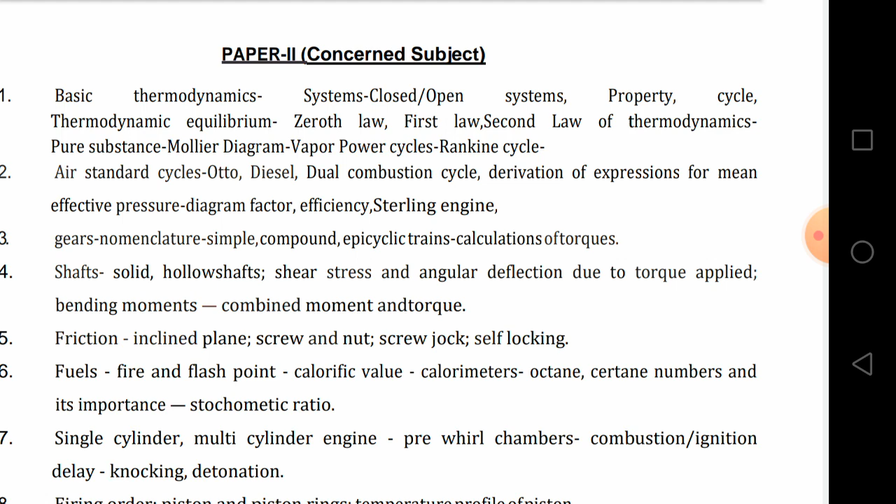Before elections, we all know recruitments will be made, and it is necessary for the government to fill up existing vacancies. There are about 2.5 lakh vacancies in Telangana, and maybe around that figure in Andhra Pradesh too. So they have to fill up these vacancies.

If the notification comes - and already the Andhra Pradesh government has released a calendar in which they have mentioned this post will be recruited under Group 2 or separately - this is under the transport department, you know that. They have mentioned in the released calendar that the examination notification will be coming in the month of March.

Assuming the notification comes in March, with 1.5 months given for your preparation, the examination is likely to be conducted in the month of May. Add 2 months - so January, February, March, April, May.

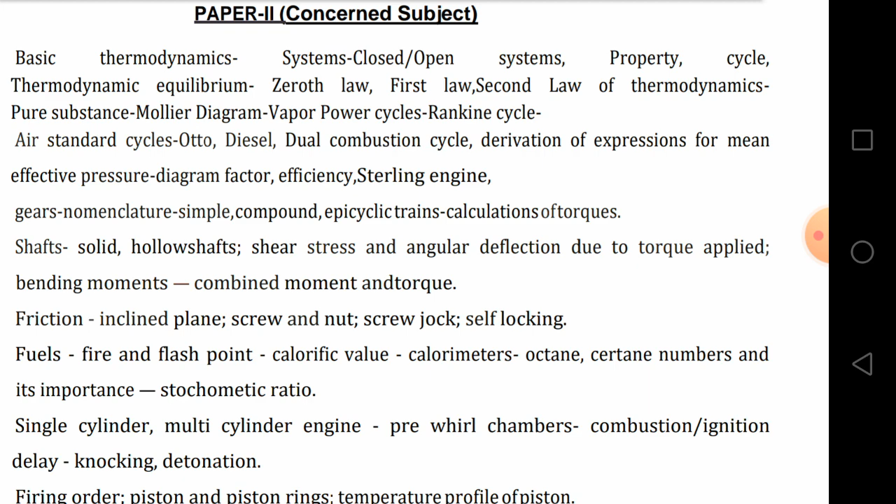So let us go to the syllabus part of this automobile engineering. I have completed 2 batches, realizing the importance of this post and the nature of the job. You are going to use your mechanical diploma or BTech mechanical engineering knowledge, you are definitely going to use it.

It goes without saying that we will definitely excel in the field related to our own field. For example, if you are a mechanical engineer, diploma holder in automobile or mechanical, or a BTech holder in mechanical engineering, you will thoroughly enjoy this job. This is a uniform job, and the job prospects are very great, as you all know - I need not elaborate on this.

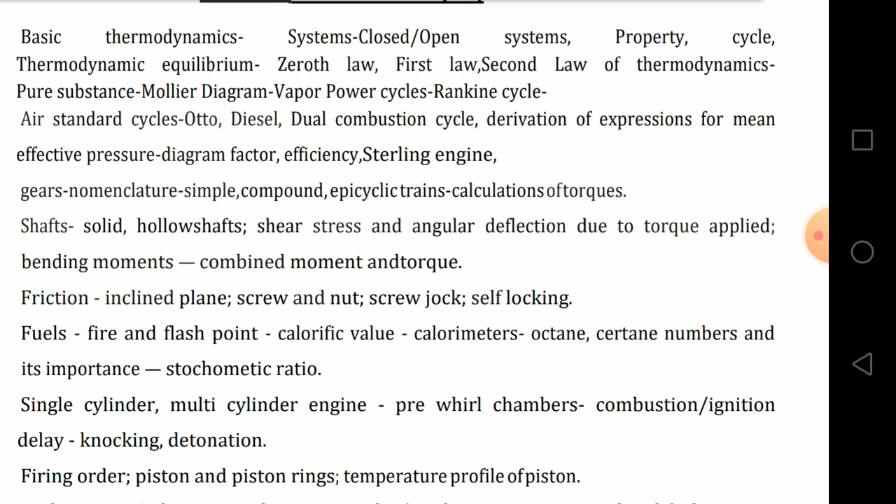So now let us go to the syllabus part of automobile engineering. I have completed 2 batches. Some friends who realized the importance of this job, and the time element and amount of preparation required for 2 papers - Paper 1 and Paper 2 - have already joined and completed their entire syllabus.

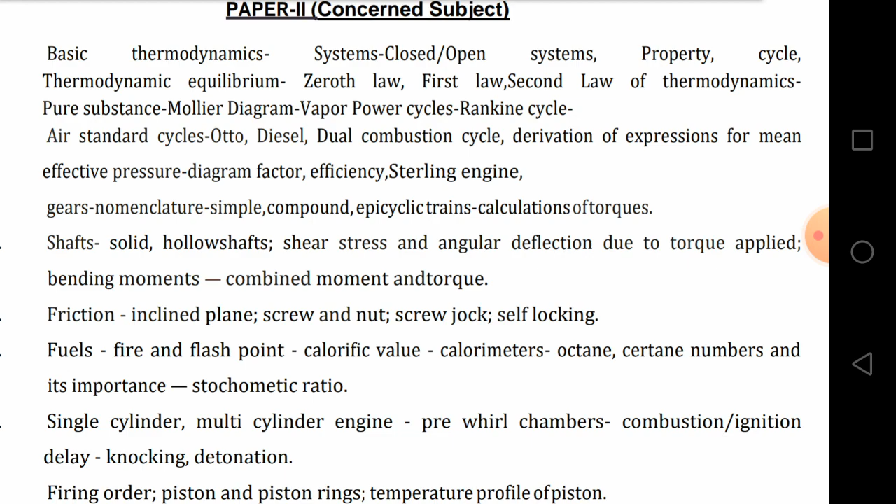I have completed this entire syllabus single-handedly, meaning there is no change of faculty. Normally in other institutions there may be different faculty for different subjects, but here there is no question of such a change of faculty - I am dealing with the entire subject myself.

I am basically MTech in mechanical engineering production, BTech mechanical and MTech production. I worked for a number of years in teaching, probably more than 20 years of experience. I have taught automobile subjects for more than 10 years.

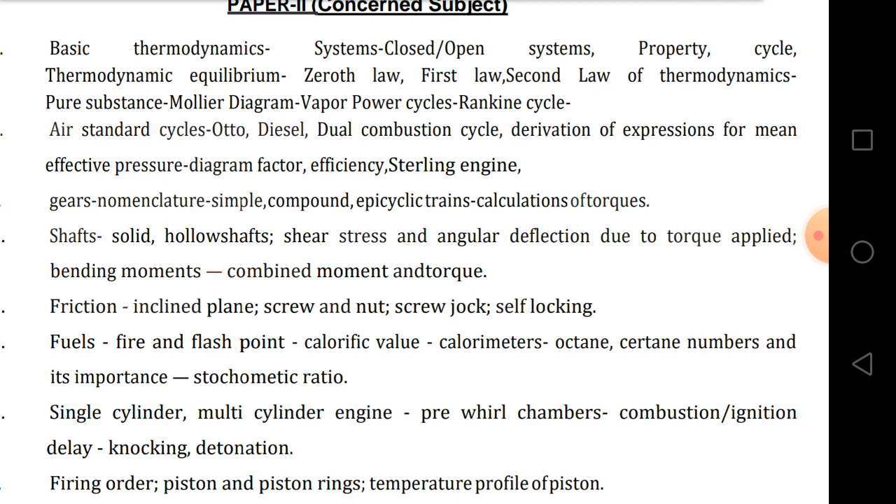Let us throw light on this particular syllabus. It goes like this: basic thermodynamics - you have systems, closed and open system, property, cycle, and thermodynamic equilibrium, Zeroth law, first law and second law of thermodynamics, pure substances, Mollier diagram, vapor power cycles, and Rankine cycle. We are going to discuss all these things.

I am taking the batch, teaching morning 1 hour and evening 1 hour to complete the syllabus. So if we take up classes every day for 2 hours, we will finish the syllabus in 2.5 to 3 months.

If we go 1 hour per day, we can complete it in 3.5 months. So this is your basic thermodynamics. If you go by the syllabus, our mechanical syllabus will be of such nature that it mentions only one topic, for example thermodynamics laws only.

In the Telangana syllabus it was mentioned as thermodynamic laws, but it includes all these laws. So what is thermodynamics and the different types of systems, and basically 3 laws are there - actually 4 laws. Zeroth law of thermodynamics, first law, second law, and also third law, which tells us about absolute entropy. It will just be mentioned simply like that.

For example, in cycles you have to study a lot of things, and in systems you have to study open system, closed system, and the flow energy equation, like that. So there are so many things, and you have to practice a number of problems in every topic.

And if you go to air standard cycles - Otto, diesel, dual combustion cycle, derivation of expression for mean effective pressure, diagram factor, efficiency, and Stirling engine - to study the cycles itself, I have taken 3 to 4 classes.

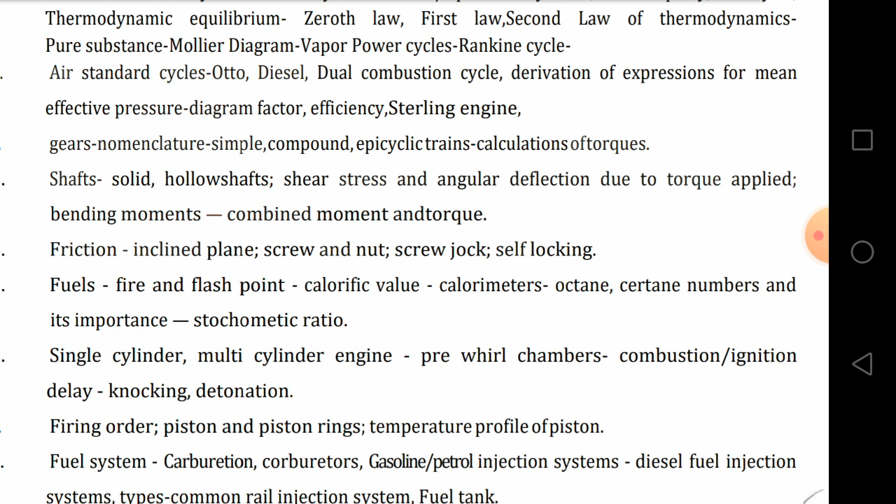Also comparison between various cycles - here he has not mentioned about the comparison, but we have to compare cycles like Otto cycle, diesel cycle, dual cycle, etc. And then diagram factor, efficiency, and Stirling engine. So what is the relationship? All these cycles are related to your Stirling engine.

So definitely we have studied all these things. Now coming to gears and nomenclature - this is coming to your theory of machines part. So after thermodynamics, now it is kinematics of machinery, KOM.

Gears and nomenclature, simple compound epicyclic gear trains, and also calculation of torques. This has actually consumed 3 classes.

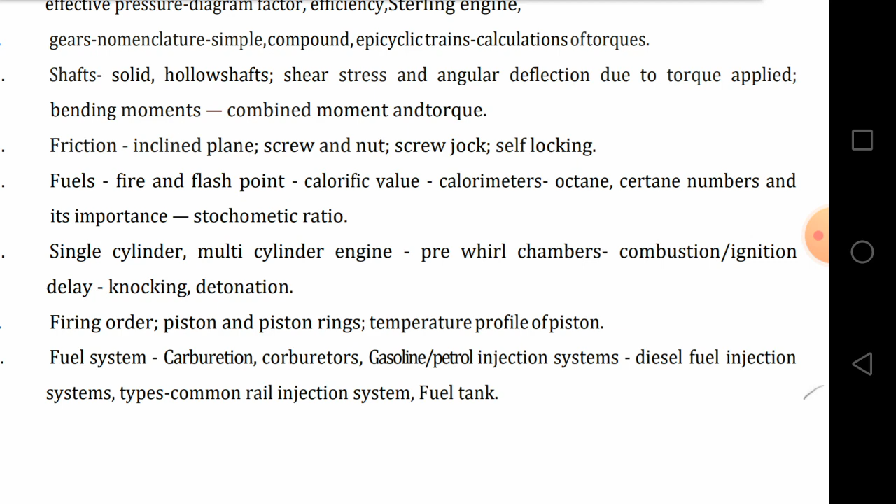Now coming to shafts - solid hollow shaft, shear stress, angular deflection due to torque applied, bending moments, combined moment and torque. A shaft is basically a mechanical element used to transmit power. You have to know the difference between axle and shaft, and one more thing.

It is subjected to various types of loads. Basically it is subjected to 2 types - shear stress due to rotation, and bending stress and shear stress. It may sometimes also be subjected to axial load, causing axial stress. For example, marine shafts are subjected to 3 types of loads: axial load, bending load, and torque due to rotation.

So all these things we have to study. For hollow shaft, we make a comparison with solid shaft - how it is different, and what is the saving in weight if using a hollow shaft instead of a solid circular shaft. We also combine bending moment and torque, because the nature of bending stress and shear stress are different - you cannot combine them directly, you have to combine through principal stresses. This also we have done.

Then comes friction on the inclined plane, screw and nut, and then screw jack and self locking. What is the condition for self locking? What is the efficiency of a screw jack, and what is the effort required to raise the load and lower the load, and so many other things are involved.

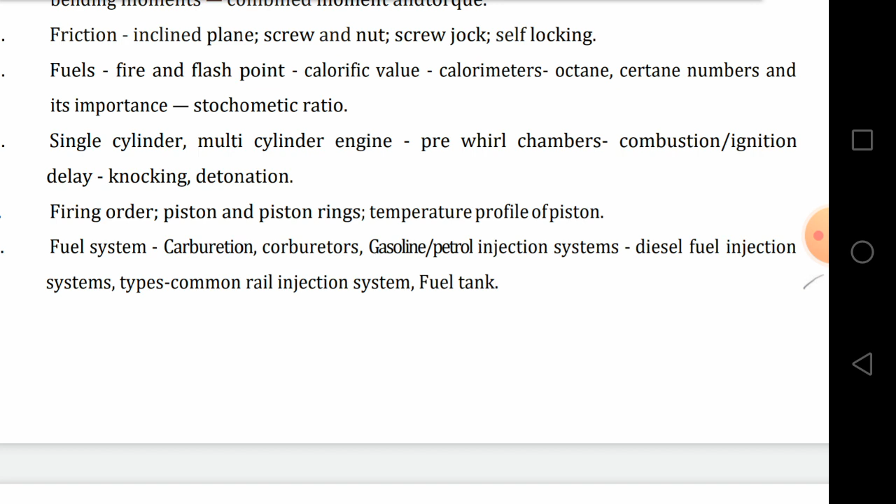And also what is octane number, cetane number? We know that it is how your SI engine fuel or petrol is rated. Similarly, cetane number, your diesel fuel is rated through the cetane number, and then its importance. And also stoichiometric ratio, what is stoichiometric ratio? It is 14.5:1, the amount of air and fuel ratio which results in complete combustion of the fuel.

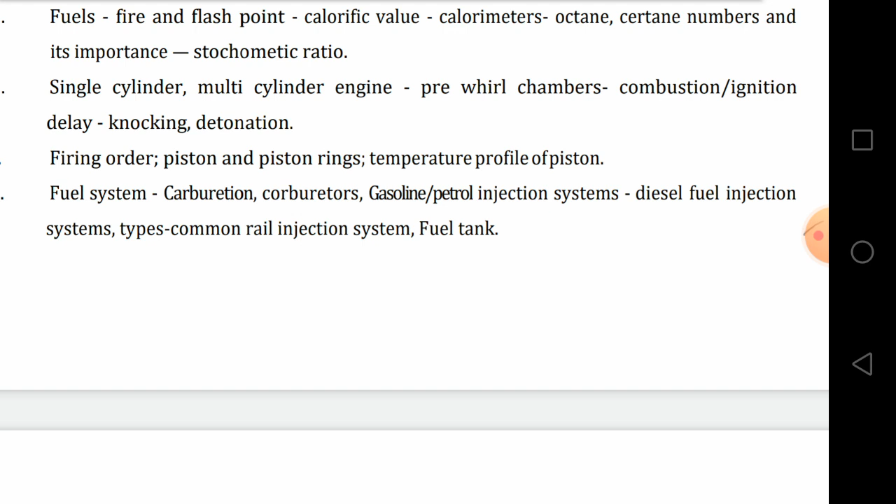Your vehicle will be operating in different conditions, starting, idling, and acceleration. The requirements of air fuel ratio depend upon the engine operating conditions, first gear, second gear, third gear, fourth gear, and neutral, etc. These things also we have done.

Single cylinder, multi-cylinder, what is the difference between single cylinder engine and multi-cylinder engine? Pre-chambers, number of chambers are there: open chamber, closed chamber, direct combustion chamber, and indirect combustion chambers. Various chambers are there, we have discussed and we are going to discuss all these things.

And also combustion ignition delay. This knocking detonation phenomena is different in your SI engine and CI engine. So what are the governing factors? What factors will increase or decrease the detonation tendency, or your knocking tendency? There are around 12 to 15 factors. We have discussed how knocking is going to affect mean effective pressure, engine performance, or engine power output, etc. All these things we are going to discuss.

Then firing order, what is the firing order? It is the order in which the cylinders are fired, like in a multi-cylinder engine. For example, for a 4-cylinder engine, it is 1, 3, 4, 2. First cylinder will be fired, then third cylinder, then fourth, and then second cylinder, like this.

Then your piston and piston rings. What is the material of the piston? What is the piston ring? What is its importance, significance? What is its use? And temperature profile. You have 2 types of pistons, and we have seen the temperature profile. What is the temperature profile? It gives the temperature in various locations of the piston.

There are various locations, what you call piston skirt is there, cylinder head is there, and so many other things related with the piston are there. So what is the temperature? Piston center, what is the temperature, for example, like that. It tells us about the distribution of temperature in 2 types of pistons. Heat shielded piston is another piston, and we have discussed all those things.

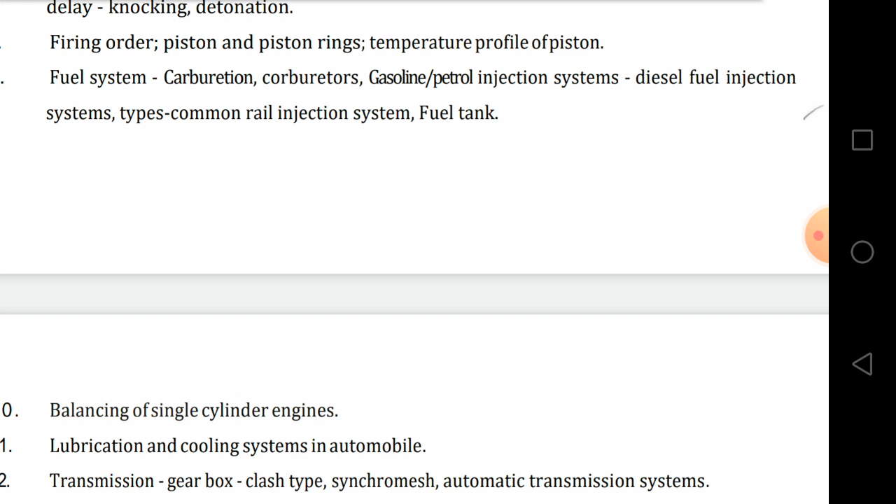And then comes your fuel system, carburation. What is carburation? It is the mixing of air and petrol in the proper ratio before it goes to the cylinder, done in your carburetor. So types of carburetors also we have discussed, like open draft, based upon the draft there are types of carburetors. We have discussed them, and gasoline/petrol injection system.

So in the injection system we have petrol injection. Nowadays engines are using petrol injectors, what you call injection system. But earlier vehicles did not use injection system, only carburetor used to be there, and spark plug is going to be used there.

But in diesel, you have what you call diesel injector, fuel injector. So there is a lot of difference. Nowadays, we are going for injection systems in petrol engines also. We have discussed various types of injection systems, like airless injection, air injection, and also diesel fuel injection system types, common rail injection system. This is a very important system for your diesel injection.

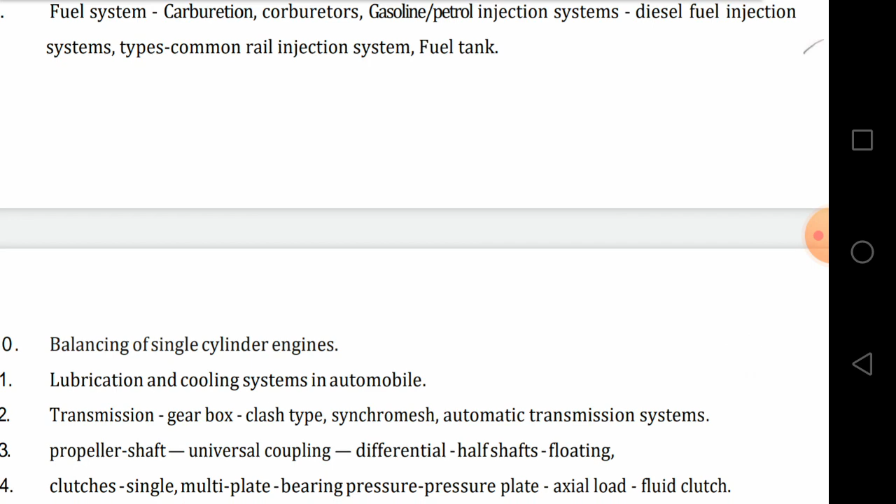And then fuel tank, what is fuel tank? How it is made? What are the materials of the fuel tank with which it is made, and which are going to have advantages? All these things we are going to discuss, and we have discussed.

Then comes your balancing of single cylinder engines. Basically, there are 2 types of mechanical parts: one is the rotating parts, other one is the reciprocating parts. You have 2 things in this: balancing of rotating parts and balancing of reciprocating parts. It's a big chapter, I have taken 5 classes for this, 2 for the balancing of rotating parts and 3 for balancing of reciprocating parts.

Then comes your lubrication.

And cooling systems. Number of lubrication systems are there, number of cooling systems are also there. We have discussed in detail lubrication systems - I have taken 3 to 4 classes. Number of things are there: what is lubrication, what is lubrication rating, how the API, American Petroleum Institute, has rated it, what is the formula for that, and all those things.

And then cooling system. In the cooling system, we have basically two types: one is the air cooling system and water cooling system, and what are the relative advantages and disadvantages, and how it is going to work with air cooling system and water cooling system. This also we have done.

Transmission, basically transmission is two types. One is the manual transmission, second one is the automatic transmission. We have discussed gearbox, normally known as manual transmission. In short, gearbox indicates manual transmission, and there are various types of gearbox, like synchromesh gearbox, sliding mesh gearbox, constant mesh gearbox - all these things are there.

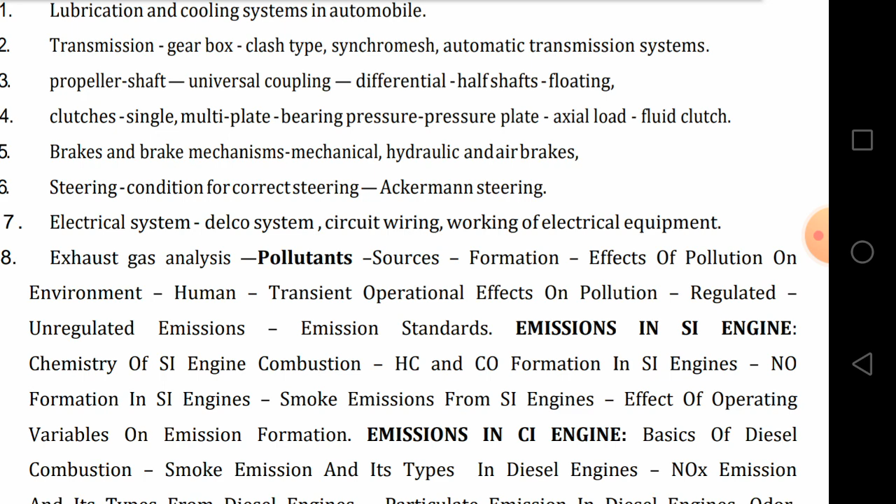It has not clearly mentioned, but we have discussed all those things: what are the advantages, what are the relative disadvantages, and how you are going to change the gear, how to get neutral gear, second gear, top gear, reverse gear, etc. All these things, and clutches, propeller shaft - this all comes under transmission, from transmission of power from engine to differential. And what are the connected things? The universal coupling, differential - all this comes under your transmission system.

Then your clutches. What are the different types of clutches? What is the importance of clutch? What is the main use of a clutch? And then bearing pressure plays a very important role in place of clutch. And then fluid clutch also we have discussed, in which the power is transmitted because of the action of the fluid between the driven shaft and driver shaft.

Now comes your brakes and brake mechanism. Types of brakes - number of types are there: mechanical, hydraulic, and air brakes. So what is the advantage of air brakes? You know that air brakes are used when you have to stop the vehicle at short distance.

And then your steering condition. There are basically two types of steering gears: Ackermann steering gear and Davis steering gear. We are going to study about the Ackermann steering gear, condition for correct steering, and also we are going to do some basic problems.

And cot phi minus cot theta is equal to B by L - that is the condition for correct steering, and we have discussed this. And there are a number of differences between these two, Ackermann steering gear and Davis steering gear. We have discussed all those things.

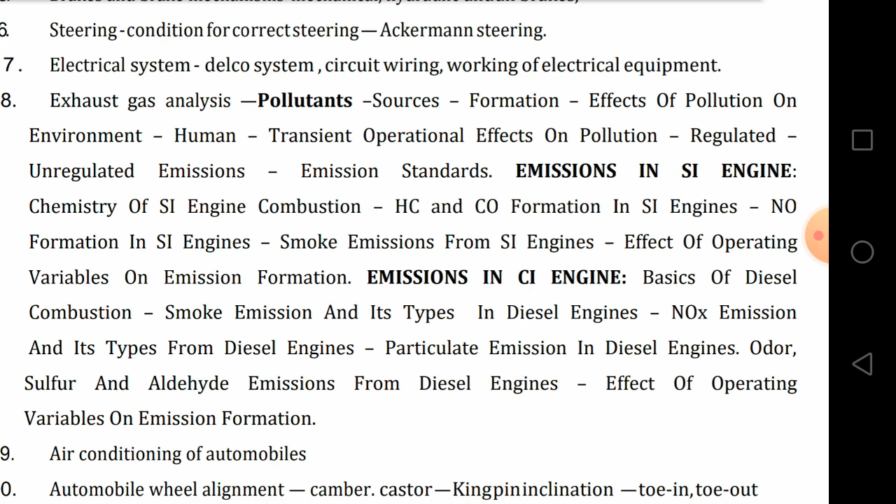Electrical system: Delco system, circuit wiring, working of electrical equipment. Various electrical equipment are there, and how they are going to work - we have discussed all those things, and especially this is a very, very important topic, friends.

Your exhaust analysis, in the last 2018 paper, I have seen about 12 to 15 bits were asked, more than 12 bits from this particular exhaust gas analysis only. So all these things: sources, formation, effects of pollution on environment, transient operation - especially emission standards are very, very important. You can get some good questions from your emission standards.

Currently we are using in India, and internationally, various emission standards - they are called Bharat stage emission standards. We have discussed all these things.

Then comes emission in SI engine. So emission phenomena in SI engines are going to vary from emissions in CI engines - like what is the chemistry of SI engine combustion. This all comes under combustion, and then after combustion you are going to have the exhaust. In the exhaust we are going to have three elements: hydrocarbon emission, unburnt hydrocarbons, carbon monoxide, and NOx emission. So there are going to be a lot of differences between NOx emission in SI engine and CI engine.

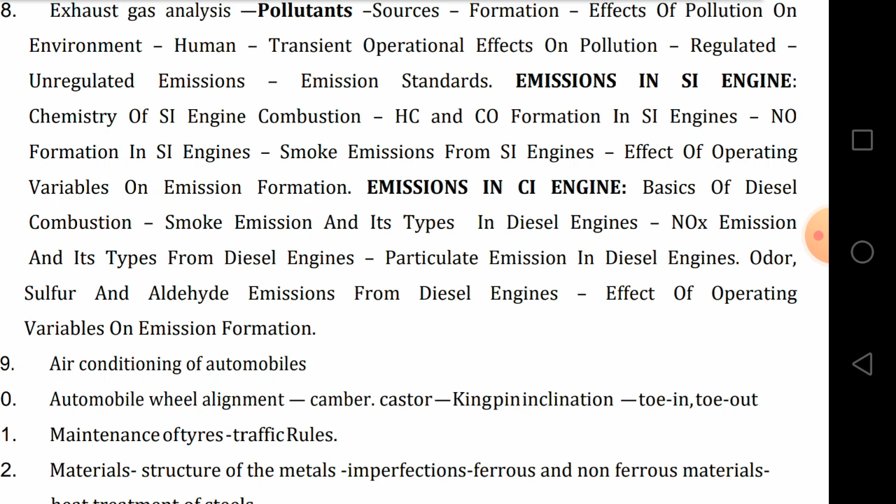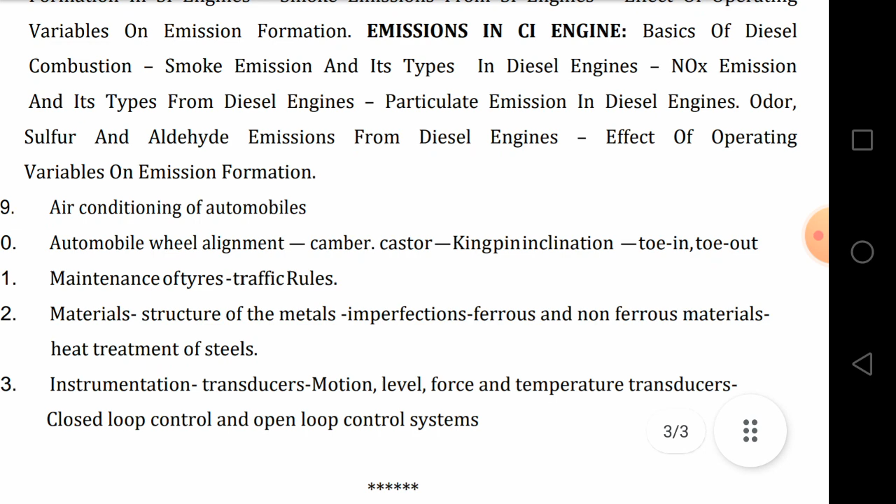We have discussed all these things, especially smoke in case of diesel engines in some operating conditions, effect of operating variables, and emissions in CI engines. Also CO emissions, HC emissions, and NOx emissions in both engines. Particulate emissions you can see only in diesel engines, not in SI engines. Then odor, and other emissions like sulfur and aldehyde.

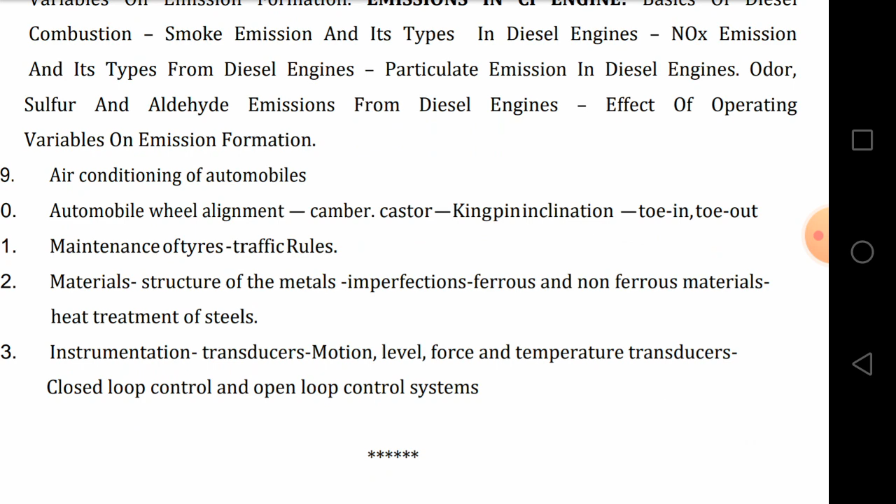And what are the effects of operating variables on these engine emissions, like CO, HC, and NOx emissions.

Then we have studied about air conditioning systems. What type of air conditioning systems are used? We have two systems: one is the simple vapor compression refrigeration system, and the other is the vapor absorption system. We studied their advantages, disadvantages, relative advantages and disadvantages, and if any other refrigeration systems are there, what is the difference between those.

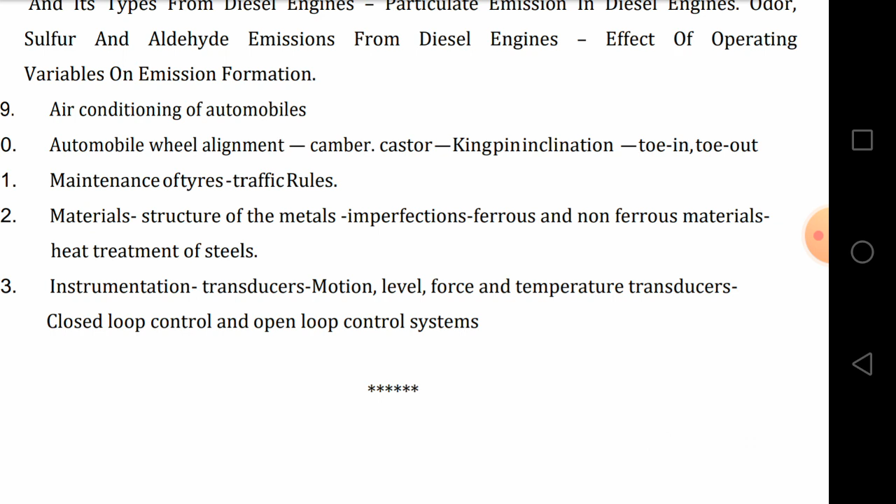Then comes wheel alignment, which is very, very important, from automobiles. For this we have studied from Kirpal Singh's Automobile Engineering, volume 1 and volume 2. For IC engines, we are going to follow IC Engines by V. Ganesan.

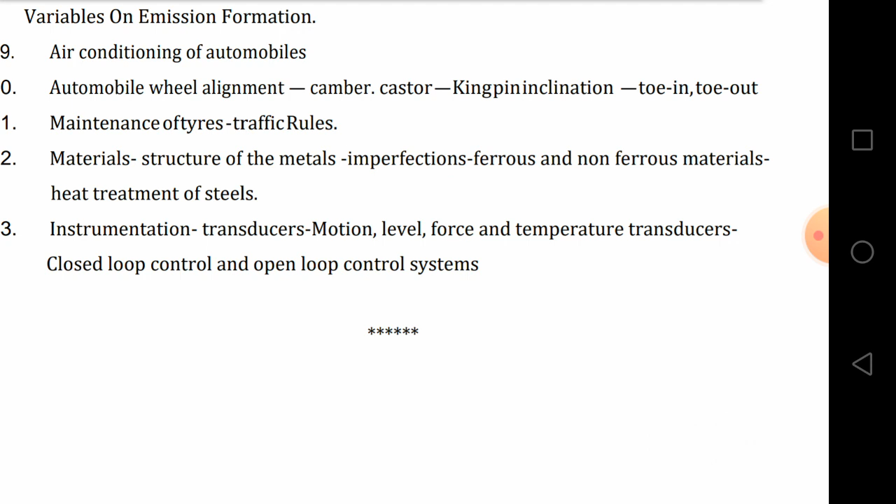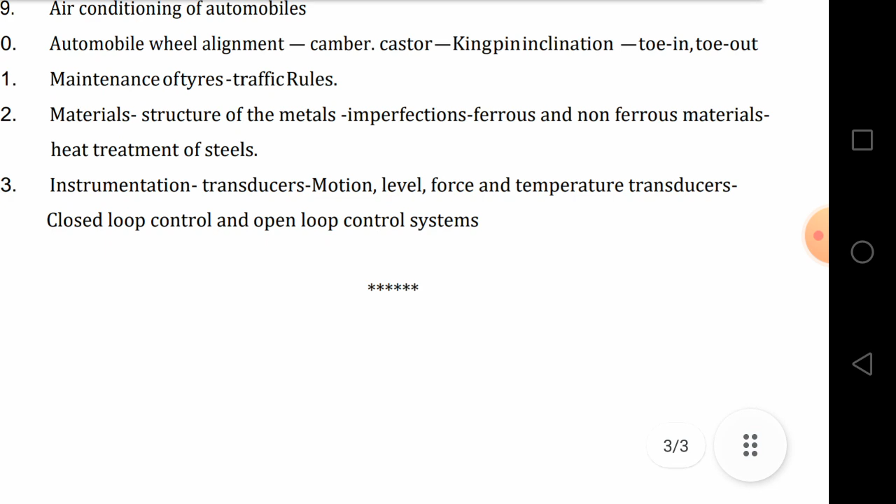Then comes castor, camber - these are basically angles, or kingpin inclination, also an angle. Toe-in and toe-out are the distances between the front and rear. So all these things we are going to study, along with maintenance and traffic rules. Traffic symbols are there, for which each traffic symbol denotes a particular activity - these things also we have to study.

And materials, especially this comes from material science. I have a very good book to refer to, written by a new author - I forget the name right now. So we have this also, something like engineering materials.

In structure we have FCC, HCP, and also BCC - all these things we are going to do. Then imperfections: line imperfections, point imperfections, surface imperfections and volume imperfections - all these things we are going to study. And of course ferrous and non-ferrous materials, and heat treatment of steels. In heat treatment we are going to study tempering, normalizing, hardening and all these things.

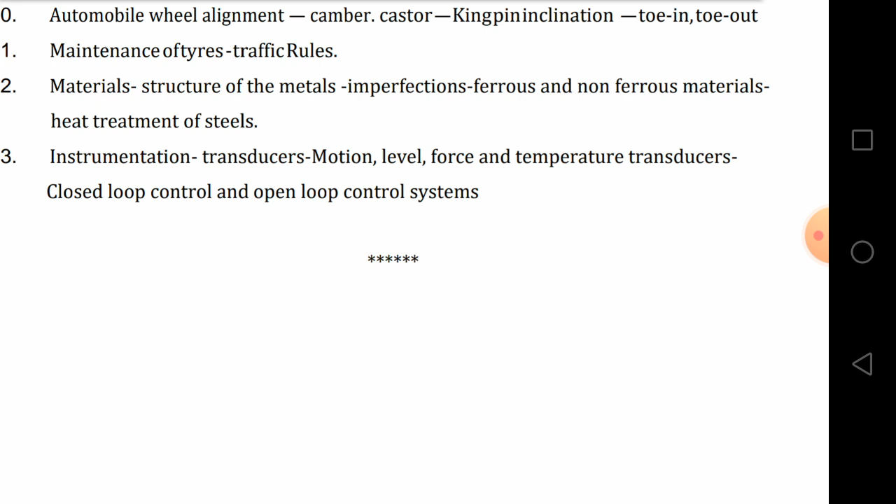Then comes instrumentation - this is a very, very important topic, friends, which you must not have studied. We are also going to see transducers - it gets some signal and converts it. Open systems and closed systems - how open loop control systems are different from closed loop control systems. All these things we are going to study.

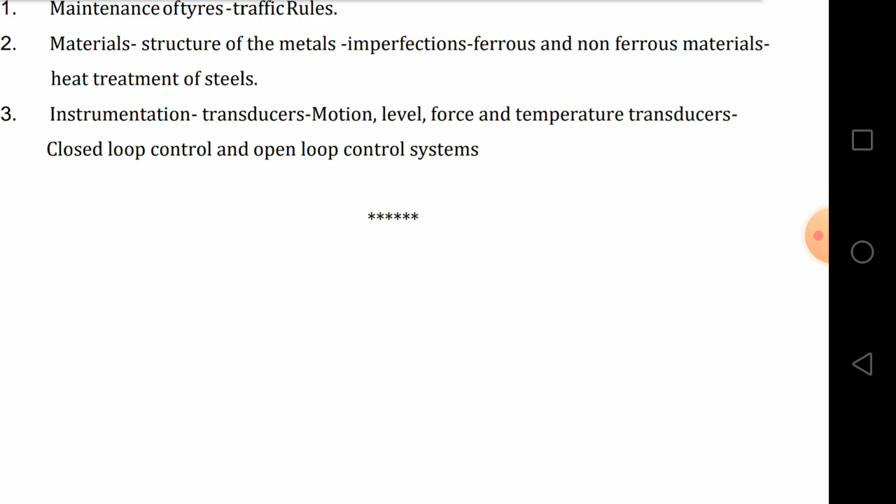Motion, level, force, and temperature transducers - they are going to measure and tell us the difference about motion, level, force and temperature transducers. Then the relative advantages and difference between closed loop and open loop control systems.